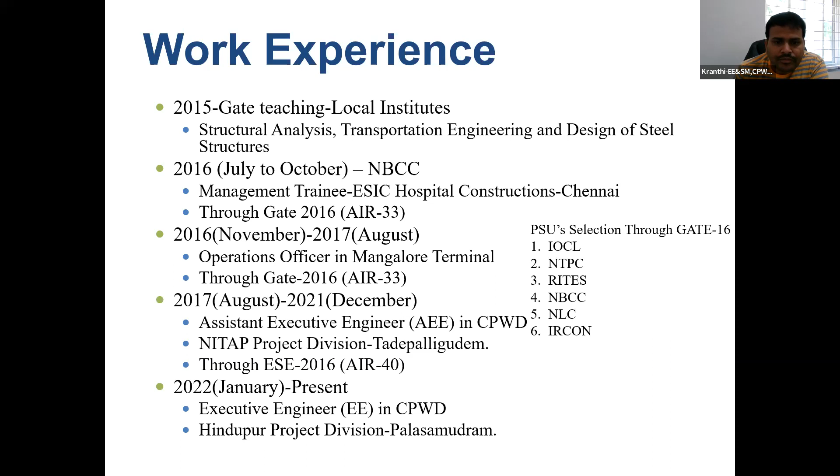So coming to this NIT Andhra Pradesh, when we were given the task to construct it, they said they had to occupy the campus within a 1.5 year span. There was no temporary accommodation for the people, so they asked us to construct very fast and deliver within almost 1.5 years. To deliver this entire campus, we divided the construction of NIT into two phases. The first phase, they said, is sufficient to occupy and conduct the classes.

It is very difficult if you go with normal cast in situ construction. So what we opted for is the precast or prefab building system. On this screen you can see these different elements. Can you see my arrow?

Yes, sir. It's visible, sir.

Yes. If you see in this system, this is the framing system, where we will be having columns, beams, and these are the walls, this is the staircase, and this is the foundation. This is the footing part. This is the stem column, and this is the footing.

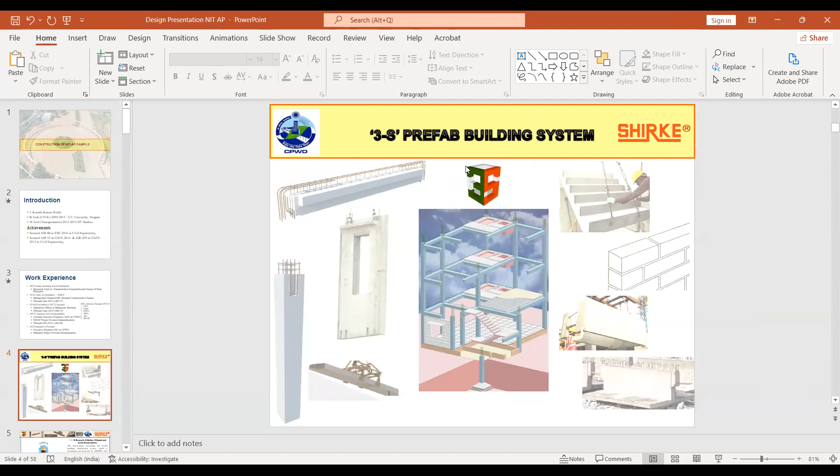We can't see the video, sir. You can't see the video? Yes, sir. The video is not visible. It's not visible. Okay. So I have shared it, but... Now can you see? Now it is visible? It's visible, sir. Okay, chalo.

Yeah, see, these are the columns, these are the hollow columns, and these are the beams I am talking about. These beams are not casted 100%. These beams are casted 75% at the precast factory, and the hollow columns are casted at precast, and they will be taken to the site, and there they will assemble them using tower cranes.

And if you see, this is the beam that is casted. Whatever development length is there, LD, they will be casting at site only, and there will be sleeves in the column, and they will assemble at site. And at site, to transfer the load from top floor to bottom floor, they will be using these dowels. This is the technical term we use. These dowels transfer the load from the top floor to the floor below.

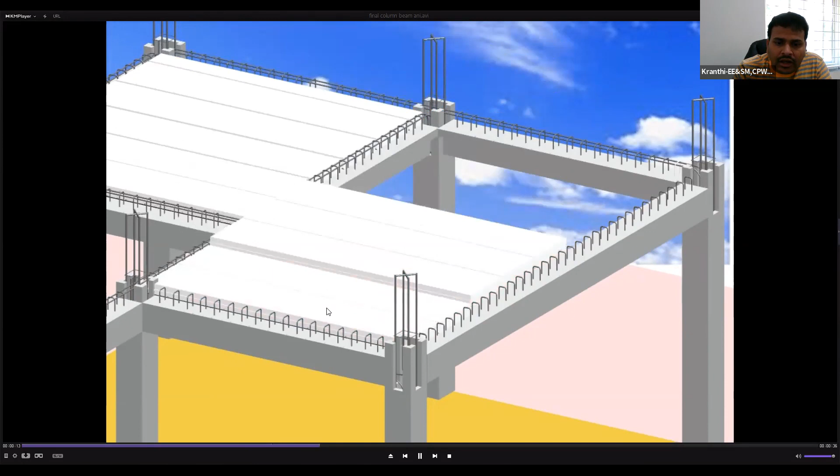And these are the slabs, and I will be showing the site photos to you later. These are also casted 75%, and they will be keeping this steel. And these are the top reinforcement in the beams, and they will be doing the concreting again inside the columns as well as the slab.

So this portion we call a screed. Once this assembly is done, we will be doing the concreting. This we call screeding. So this is the simple way each frame of the building has been constructed.

So now coming to this. What Shirke has opted is a technology developed by Shirke itself. They call it 3S prefab building technology, where 3S stands for strength, safety, and speed. If you follow these three in any construction, strength, safety, and speed, you will definitely...

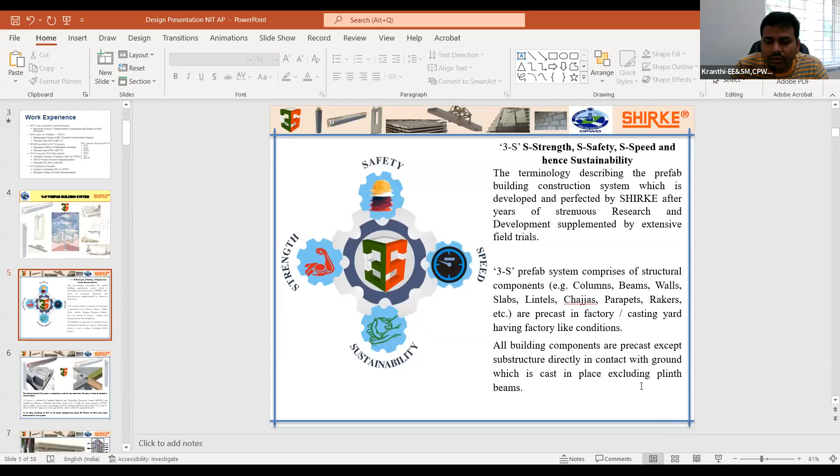So now it is visible. Yes, sir. Yes. Okay. Sorry.

So coming to this, the technology I have shown to you is the technology developed by the Shirke team. They call the system a 3S prefab system, where 3S stands for strength, safety, speed, and sustainability. So if you follow the three at a time, strength, safety, and speed, definitely you will be achieving sustainability.

Usually this 3S prefab system comprises mainly the structural components like column, beam, wall, which are the heart of any frame structure. All these structural members will be cast at a precast or casting yard, transported from the factory to the site, and erected using tower cranes. But when it comes to the foundation, what we call the substructure, they will do cast in situ.

It is a normal thing. So these are the small pictures where you can see this. These are the walls and these are the slabs. On the slab, they will put the screed reinforcement and do the screed. In this 3S prefab system, there are two types of precast technology Shirke has adopted. One is the column-beam junction. It's a frame where the slab rests on the beams, the beams rest on the columns, and the columns transfer the load to the footings. This is called a framed structure, what we normally use.

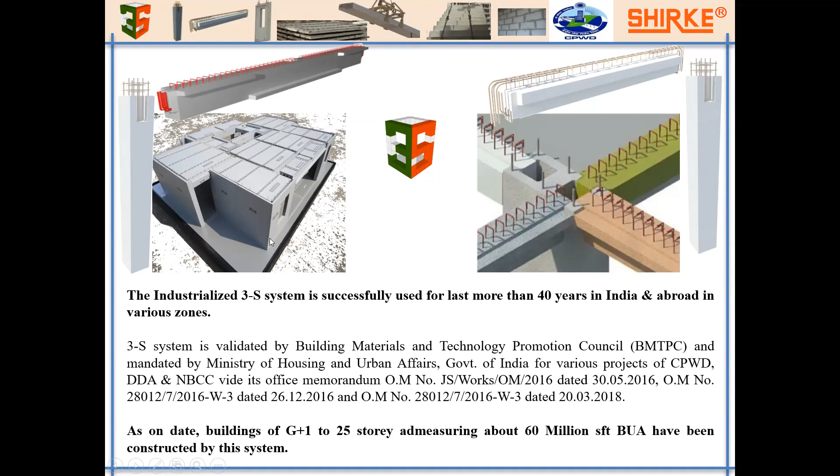Column, beam, framed structure. Whereas in the other technology, they use walls. Here there will be no columns. Only the slab will be directly resting on the walls, and these walls are precast walls. The load from the slab will be transferred directly to the walls, the walls transfer the load to the bottom floor walls, and the ground floor walls transfer the load directly to the plinth beams.

This is the technical term. It's nothing but a beam. The beams placed at ground level are called plinth beams. So these walls transfer load to the plinth beams, from plinth beams to the stem columns, from there to the footings, and from footing to the ground. So there are two ways you can precast: one is by adopting the walls, and the other is adopting the framed structure.

Usually we use walls in, for example, a hostel building where we have a repetitive nature, like all similar rooms, spans are very small, and the height of the building is also low. There we can use precast walls. Otherwise, if we have very large spans and the floor-to-floor height is very high, we can use the framed structure.

This 3S system they adopted is already validated by the Building Materials and Technology Promotion Council, which is mandated by MoHUA, the Ministry of Housing and Urban Affairs. Using this technology, they can build from ground floor up to G+25 stories. I think they have constructed more than 60 million square feet of built-up area. These I already explained to you.

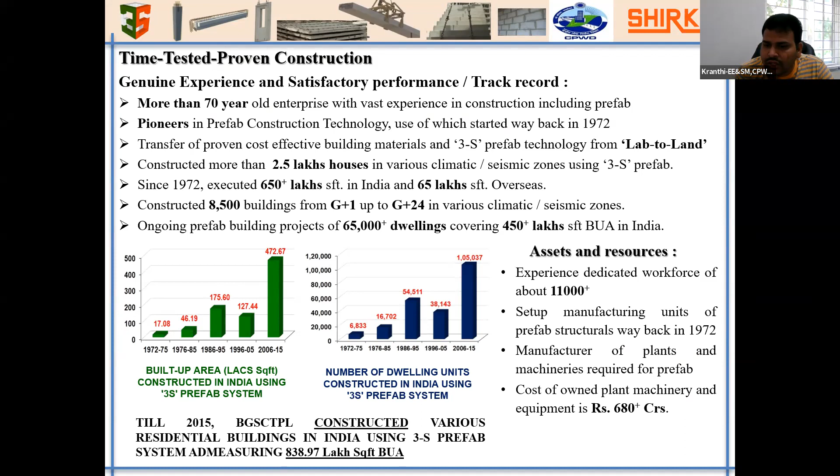This technology is a time-tested, proven technology in construction. I think they have been adopting it for more than the last 70 years. This slide shows how the built-up area has increased over the years using prefab, because nowadays everyone wants their buildings in a very short span of time with very good quality, and because of this everyone is adopting precast technology.

So coming to this, before going to the construction part, I have to say what some of the design assumptions are that we considered while designing NIT Andhra Pradesh.

So these are a few conditions which we already kept in my tender. Based on this, the contractor has to follow this construction. Whatever foundation we specified should be a minimum M25 grade. Up to foundation level, they should be doing cast in situ construction. Above that, they can adopt precast, and we plan to design this entire campus for a 3-star Griha rating.

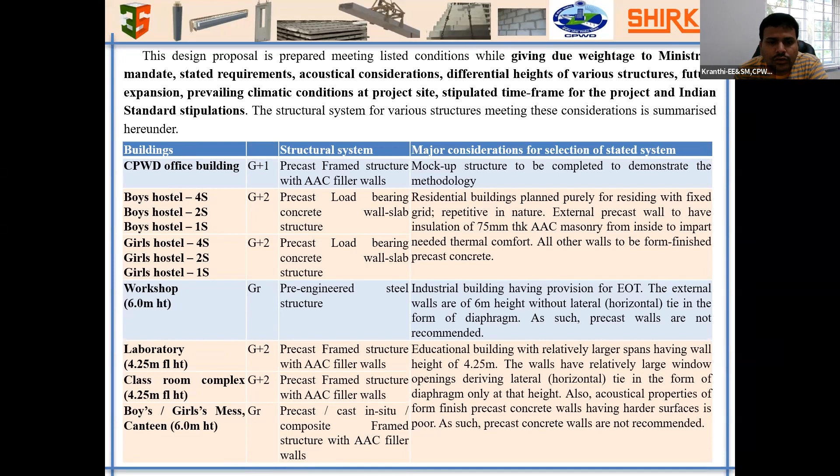These are a few buildings, mainly the phase 1 buildings, where they adopted certain types of structural systems. If you see my CPWD office, laboratory, classroom complex, boys mess - all those adopted precast framed structure with AAC filler walls. The remaining hostels adopted precast load bearing concrete wall slab structure, which I explained previously - these two systems. Some of the quarters mostly adopted precast framed structure with AAC filler walls.

These are some minimum criteria. For all substructure RCC, we used minimum M30 grade, and foundation we went up to 2.5 meters depth, where we have a safe bearing capacity of 25 tons per square meter. All these things were arrived at from detailed geotechnical surveys, and we have designed for wind and earthquake as per IS codes, and even fire rated all the structural members for a minimum 2 hours fire rating.

This project is at Tadepalligudem, which is near the coast of Andhra. So we have taken a moderate exposure condition, and for the precast composite structural elements, we have followed hollow core columns, precast walls, solid beams, and solid slabs, including staircases also.

These are the normal things which you will be studying in your theoretical studies, and the same will be applied while designing any buildings. One is dead load - these are the few dead loads we apply as per IS 875 part 1, and live loads as per part 2. These are some materials we have used, the unit weights, and all the occupancy classification has been done as per the standards.

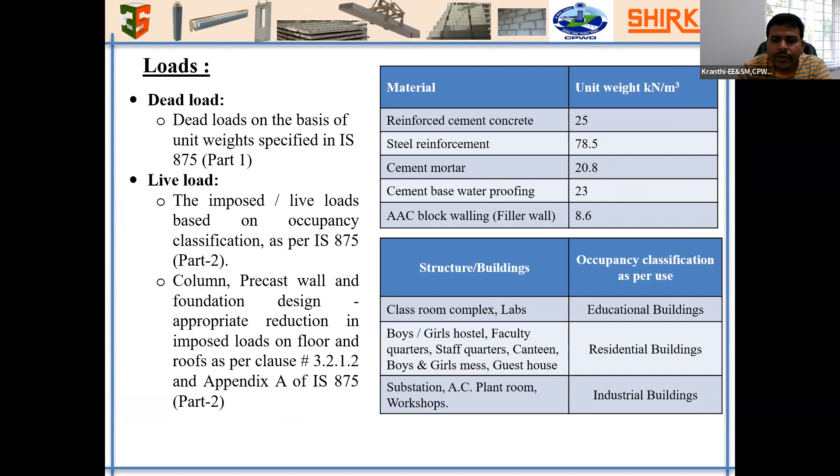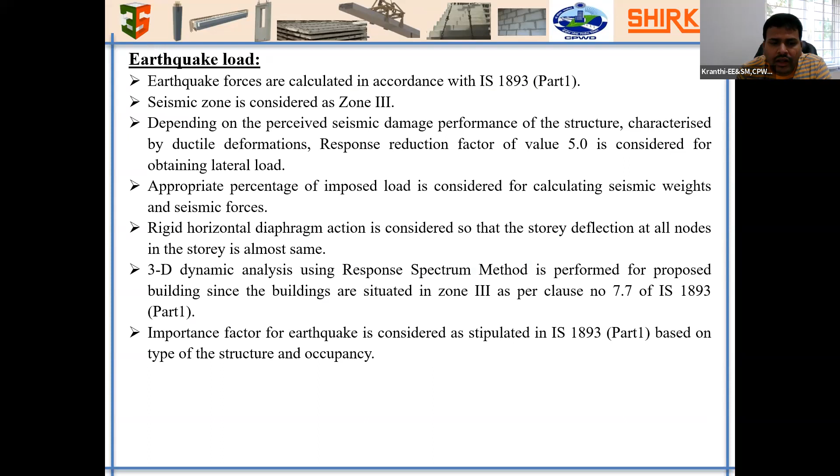Similarly, coming to the earthquake load, Tadepalligudem falls under zone 3. Based on zone 3, as per IS 1893, all this detailing has been taken - what is the occupancy capacity, what structure type it comes under, what is the importance factor, and how many residential rooms there were. All those things were taken from IS 1893.

The other thing is wet joint construction. If you opt for dry joint precast technology, you can do it very fast. But the main disadvantage is these are all non-ductile connections, where you cannot provide ductile reinforcement. Whatever reinforcement you provide as per earthquake development length, that should go from beam to column, will not be there in dry joint connections.

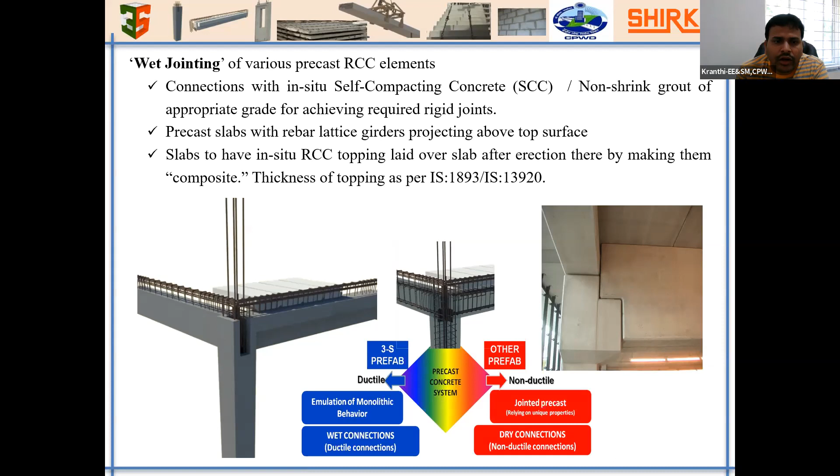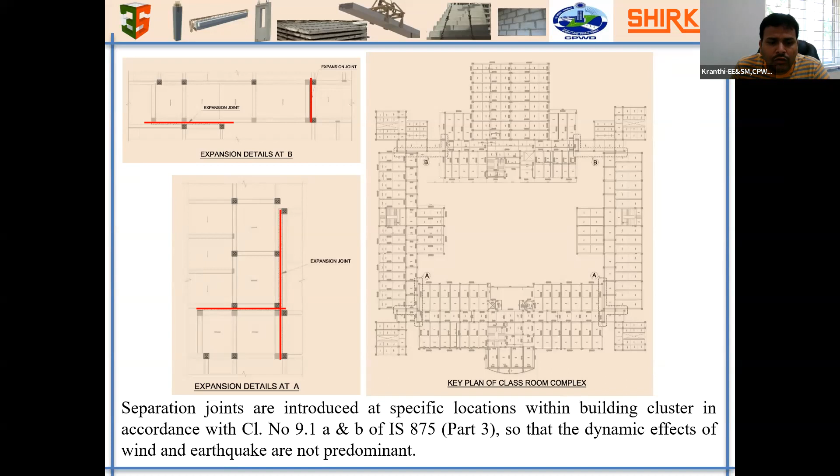Coming to this is the master layout of Tadepalli Gudem, and this is the first phase. I have not updated this drawing - we have constructed phase 2 also. While designing based on the length of the building, this is a typical classroom building. As in any construction, whether cast-in-situ or precast technology, if the length of the building comes to more than 45 meters, we go for an expansion joint. So similarly here also we will be going with expansion joints, and that provision we can take here.

For any building, when doing structural design, first they have to do these framing plans. There is a software called FrameWin - I think Shirke has adopted FrameWin to get the column sizes and all those things, and they will export this model to ETABS for further analysis. These are the ETABS models.

When coming to the design part, there is no difference between cast-in-situ design and precast design - design always remains the same. The way they execute things is different. So how a normal building is designed, the same way the precast building also will be designed - just like in ETABS, they will have a column frame and apply dead loads, live loads, wind loads, earthquake loads, and do analysis.

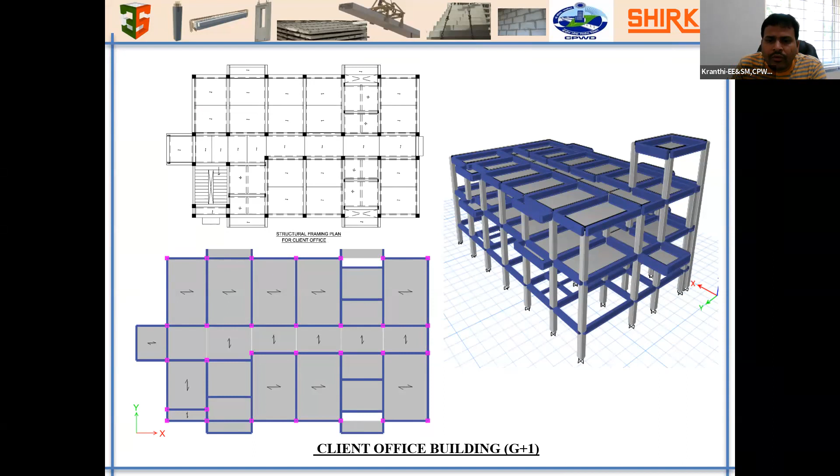So accordingly, the way how you are executing, whether with the precast wall or column beam, your design should be there in the ETABS.

And this is the workshop building where we went with a pre-engineered building. We have not adopted the precast here. Why? Because the column height is almost 6 meters. It is very difficult to have a precast column of 6 meters, and casting at site is very difficult. So what we did is we went for a pre-engineered building.

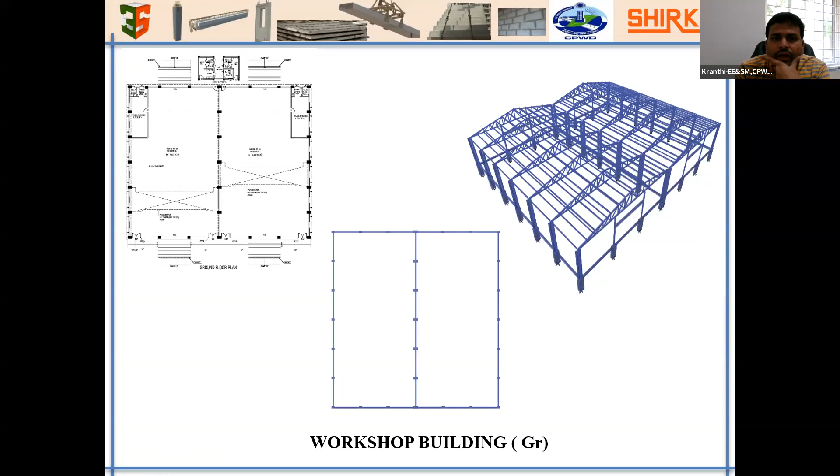Okay, so finally we don't want this look. So what we did is these columns, the entire columns, we used concrete to encase them and finished. These are the pre-engineered ones. I will show the final photos of this, and this is a typical classroom building.

And this method of design, as I already said, there is no difference between the cast-in-situ and precast. Same IS 456 will govern the design, and ductile designing will be as per IS 13920.

Okay, and these are the column reinforcements. They will be arrived at after analysis, whatever load is coming through the ETABS, they will consider this load and design accordingly. And if you see the beams, the column ETABS will give the reinforcement required along the ends and middle. According to this, they will be designing the beams, and similarly the columns.

And if you see now, in normal construction, normal cast-in-situ, whatever reinforcement is coming here, we simply adopt it here. But in precast, unlike normal cast-in-situ where we extend the column reinforcement to the upper floor and cast the column at the same time,

in precast, this column will be cast separately, and another column will be cast separately, and they will bring this column and keep it here. So first, as I already explained, at site they will be casting these hollow columns. Inside, they will not be there - these hollow square columns will be there. In these hollow square columns, they will design for whatever force is coming at this section. For this entire force, they will design the reinforcement in this hollow column. All the reinforcement will be there at all the ends, it will be taken care of.

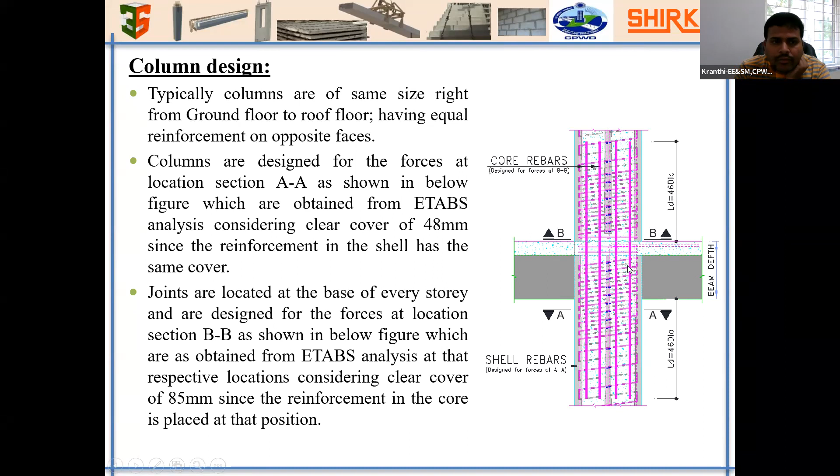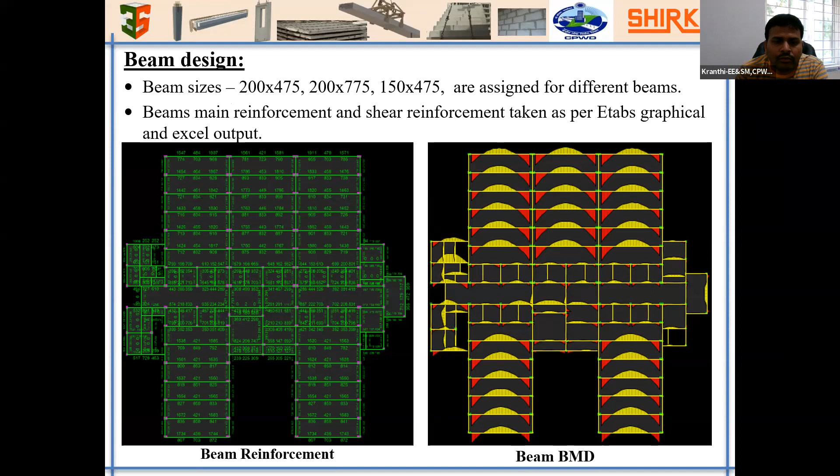This is where they do the column design. Similarly, the beam column joint they will be doing on the basis of strong column and weak beam, as you studied. And for these beams, the beam reinforcement and all those things they will be taking from ETABS models only.

And the precast wall slab, if you come to this precast wall, it will be designed as per IS 456 with the minimum horizontal forces applied and 2.5% of the vertical. These are the connections where they are giving, and they will design with the minimum eccentricity, which you have already studied, and the minimum moment of resistance of the wall based on the slender sections, and the minimum reinforcement. I am not going in depth because you already studied these in your RCC design.

And if you come to the beam column junctions, these are some beam column junctions. Maybe you cannot understand these things, so I will show this in the form of pictures. These are the casting parts that they are doing. Let me explain through the images so that you can understand. If you see these beam column connections, these are the columns, these are the hollow portions.

I think everyone can see it. Are you getting my points? If you have any doubts, you can stop me and ask. Actually, I am busy explaining, but I am not asking whether you are understanding or not. No, sir, we are able to understand. Okay, if you have any doubt, please stop me at any point of time and ask.

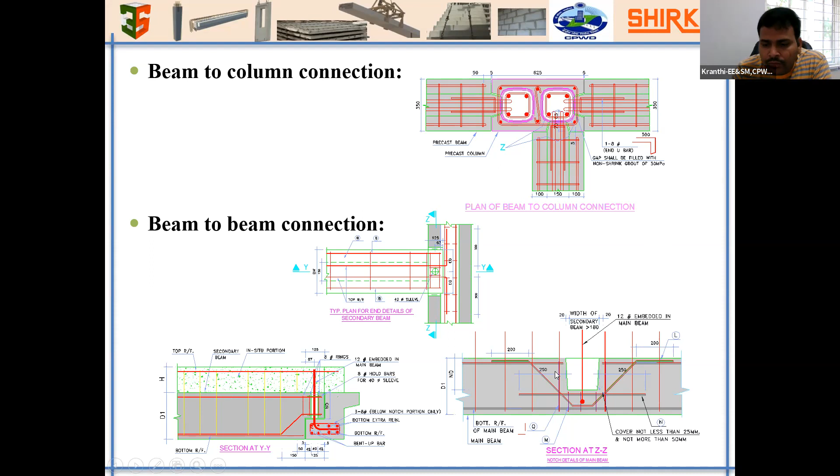And if you come to shear wall construction, the reinforcement from the column will be extended to here. If you see here, there will be a sleeve. These are the sleeves. Whatever reinforcement is coming from the dowel part, they will embed it in this, and they will put these cutouts.

They will be filled with the non-shrink micro concrete, which does not require any curing, and it will not shrink either. Okay, so this is the way they will do it, and I will show how the two walls will be connecting. If you see the connection of these walls, here there will be a wire loop. Okay, this is the wire loop.

When two walls are connecting, this side there will be a wire loop, and this side there will be a wire loop. Inside this they will be designing the reinforcement, they will assemble at site, and this white portion they will grout at site with a non-shrink grout, which will not shrink. Okay, so this is the typical two straight walls. If you see, these are the perpendicular walls. Similarly, they will be doing like this.

Okay, and these are three walls coming, and these are all the corner walls. So these are the reinforced, looped wires. Inside these loop wires they will make a design for the reinforcement, and this reinforcement will be through and through from top to bottom. So these will act as one joint. It will bind the integrity between these three walls, and these are the precast slabs.

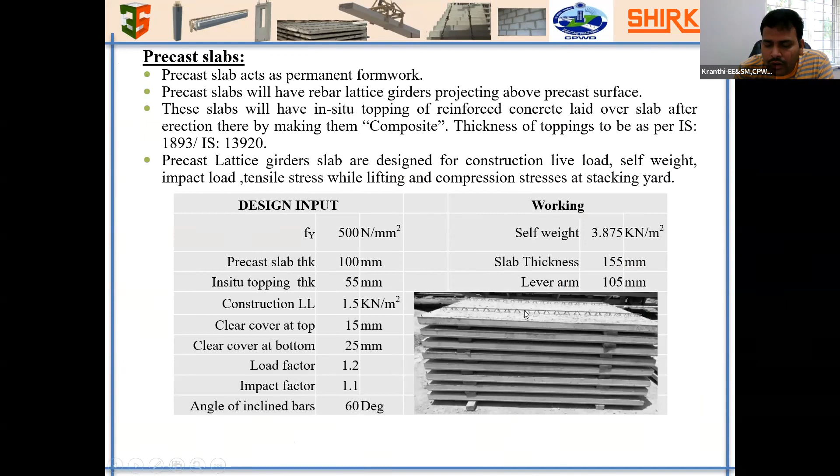So again, if you see, they will be casting 100 mm thick slabs, and they will be shifting them to the site. They will be placing them on top of the beams, and for the remaining they will be doing the screeds. Okay, and this is how they will be resting the slabs on the beams. If you see, this is the precast slab. This slab will be rested on the beam portion. This is the last beam. That's why you have an L kind of thing.

So from here the top reinforcement will be going to the beam, and this is the beam main reinforcement, top reinforcement, and they will do the screeding. Okay, if you see, from one line you can see how it is going from top to bottom. From here the dowels will be bent. If you go from bottom to top, this is the column, from footing column, stem column, it is coming.

They will place the dowels, these hollow columns will be placed, and they will do the screed up to half first. Again they will assemble these beams and all those things, put the dowels again, and do the screed. Similarly, it will go on up to n number of floors. At the top floor, whatever dowels are coming will be bent into the roof slab, and they will do the screeding.

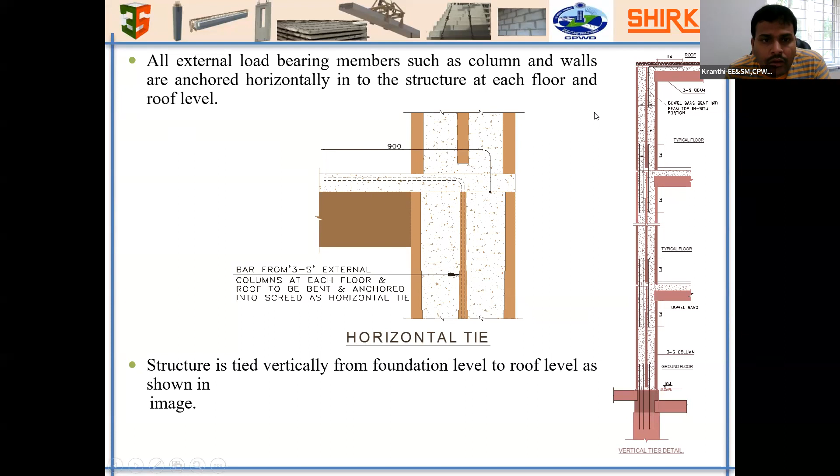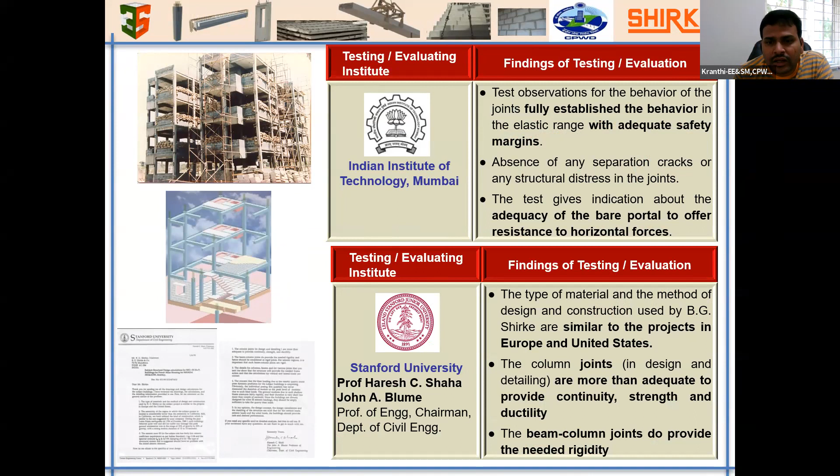They did some load tests and all those things, and these are some observations and findings given by IIT Bombay. They have some research papers on this, and this technology's patents belong to Shirke only. These are the typical field tests conducted at different places, and at IIT Roorkee they have tested this prefab system for zone 4.

If you see here, they have a framed structure for G+1 or G+3, I think, and they have simulated earthquake loads. They have seen the behavior of this building in case of earthquake, and they have a report saying that this prefab structure is well suitable for up to zone 4. They have been given a certification from IIT Roorkee. Okay, so these are some things from IIT Roorkee.

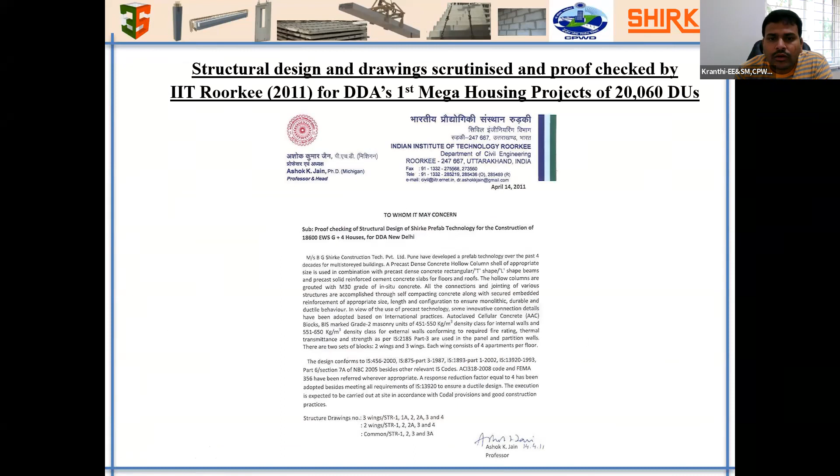So these are the few theoretical things that I have explained. So now let me explain through the site photographs, so that you will understand clearly from a site point of view. So are you able to see my screen?

Yes, sir. Yes, right? Yes. So if you come to the side, this is the... Yes. Okay, are you able to hear me? There is no problem in my voice, right?

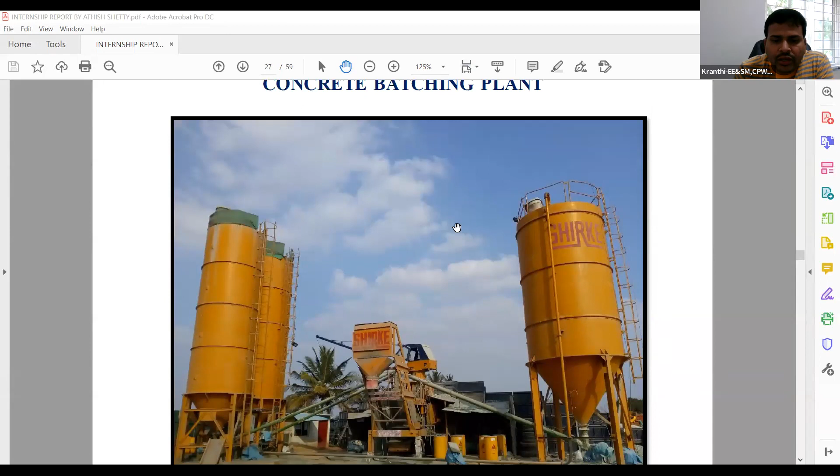Yes, sir. Okay, chalo. So if you come to the site, if you see in any site, this is a must and required: the concrete batching plant. This is where you will be doing the mix design, and these are the silos where you will be having fly ash on one side and cement on another side, and the coarse aggregate, fine aggregate, all those things will be there. And this entire equipment is called the concrete batching plant. And these are the fine aggregate and M sand or sand, whichever they are using.

Okay. So coming to this precast, first I will show you the yard, how it will be. So these are the molds. The main advantage of precast is the same molds you can use. The repetition value will be very high. If you use normal cast in situ, we will be using plywood shutters. These plywood shutters will be damaged after 25-35 repetitions. But here the main advantage is it will not be damaged and it will be in a proper controlled shape.

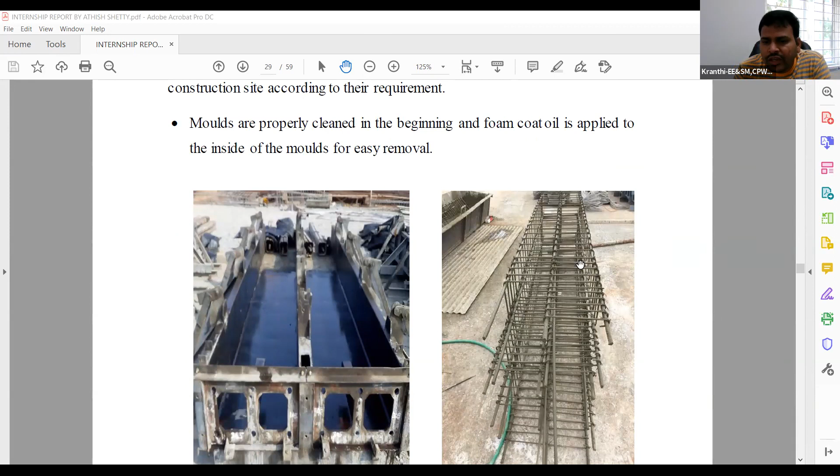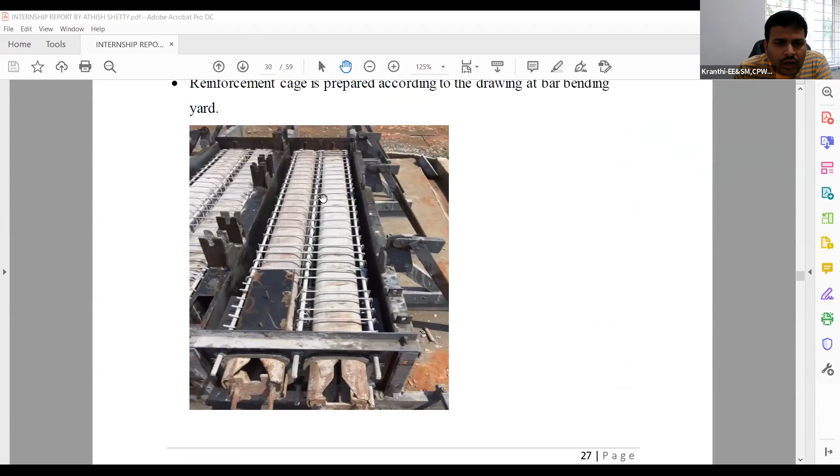So see, this is the beam mold, and this is the beam reinforcement. And if any sleeves are required, they will be providing them here, and they will be doing the concreting here. And the main advantage here is they will be having shutter vibrators. If you see here, this portion itself acts as a vibrator. On top also, wherever there are no vibrators, they will place this vibrator and do the vibration. So these are the molds.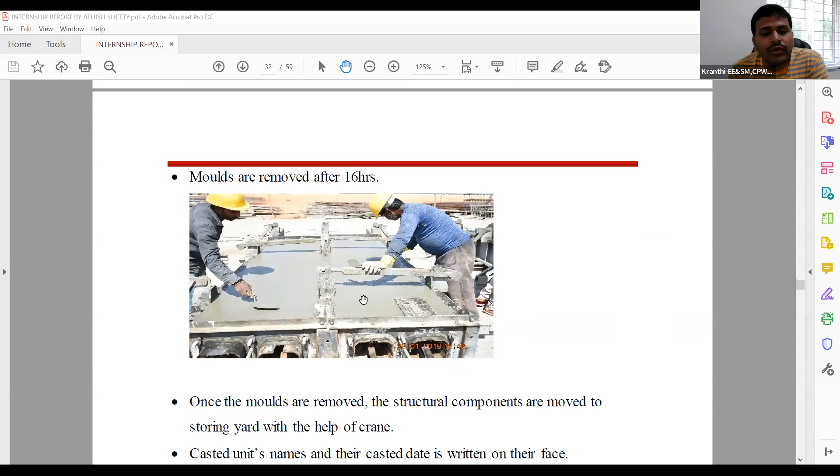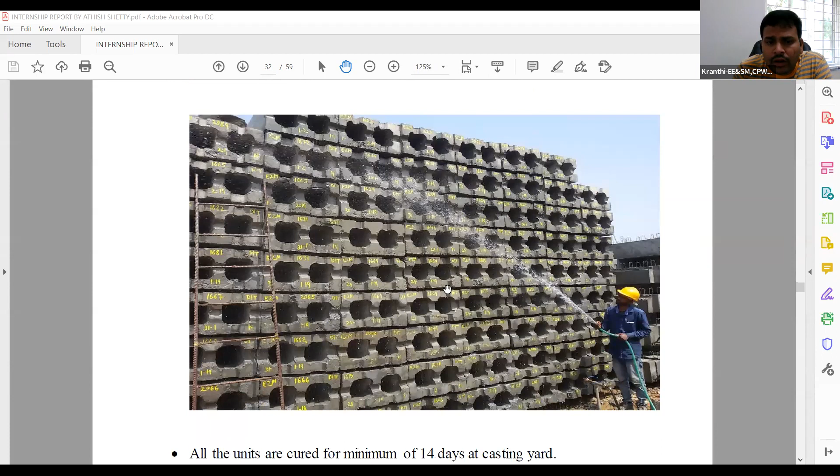After casting in these molds, after 16 hours, they will be removing these columns and placing them at the yard. If you want to remove these columns after 16 hours, it should gain the strength. So they will be using a high grade of concrete. We used minimum M50 for the columns, and for beams and slabs we used M40. These columns will be lifted with the help of cranes and shifted to the yard. These are the hollow columns, and they will be doing the curing at site for minimum 14 days under proper supervision.

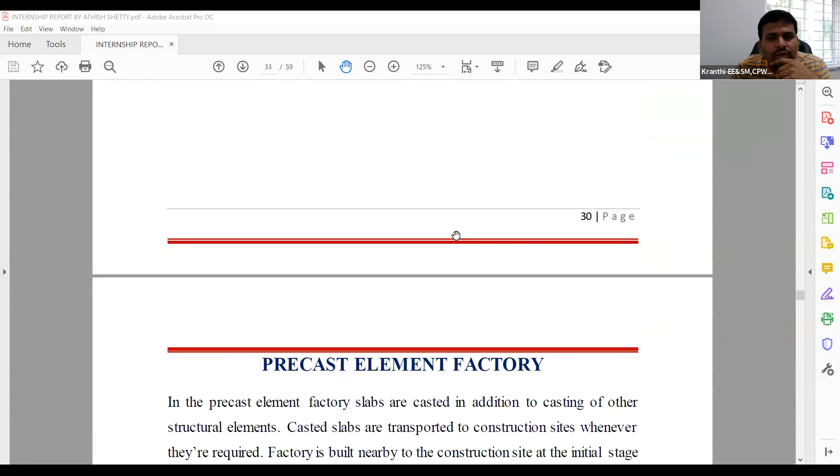And these are the stacking of precast elements. These are the columns, and these are the small slabs, and these are the small lintel beams. On the top of the door, they will be placing a small beam, because we cannot transfer the load from brickwork to the door. To avoid that, we will be placing small beams. Those are called lintel beams. These lintel beams can also be cast precast, kept at site, and cured. Now this is the way they cast columns and beams.

Now coming to the slabs and walls. This will be done in the factory, and this is how a typical factory looks. And if you see, these are the complete shutter molds that are used for slabs and walls. And these are the reinforcement they will be placing on the molds, and these are called lattice girders.

Why they keep these lattice girders is because the main concept here is they want to design everything as a one-way slab. They don't want to design it as a two-way slab. They want the load to be transferred in one direction only, not in another direction. Because of that, they put intermediate elements. This will serve two purposes.

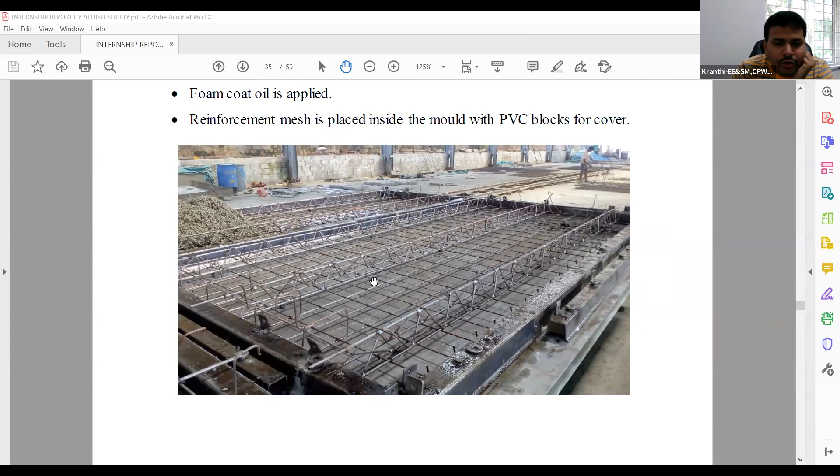This one thing, they can make LX by LY one direction. This LX they can make in one direction. And the other purpose is these lattices will be used to lift these precast slabs. So these are the cranes. Okay, using these cranes they will be doing the concreting.

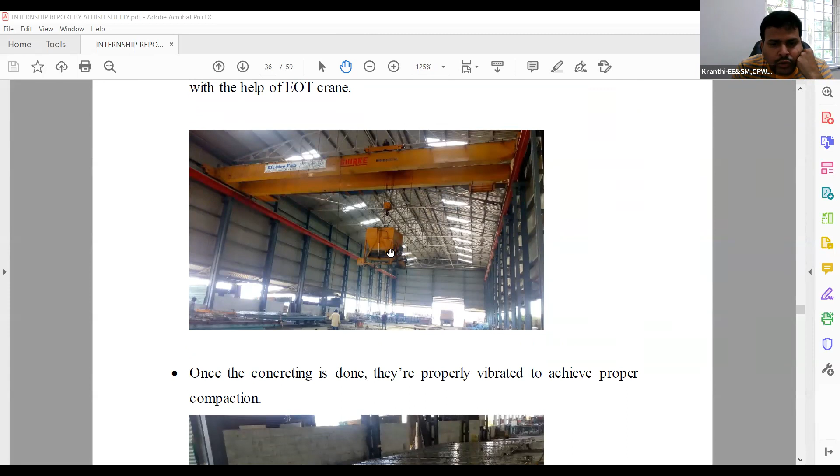So here from this batch mix plant, the concrete transit mixer will bring the concrete, and the concrete will be transferred to these things, and the concreting will be done here. And here there will be proper vibration with this shutter only. So these will be the things. And after 16 hours, they will be shifting it to the site. Okay, and they will be doing the curing.

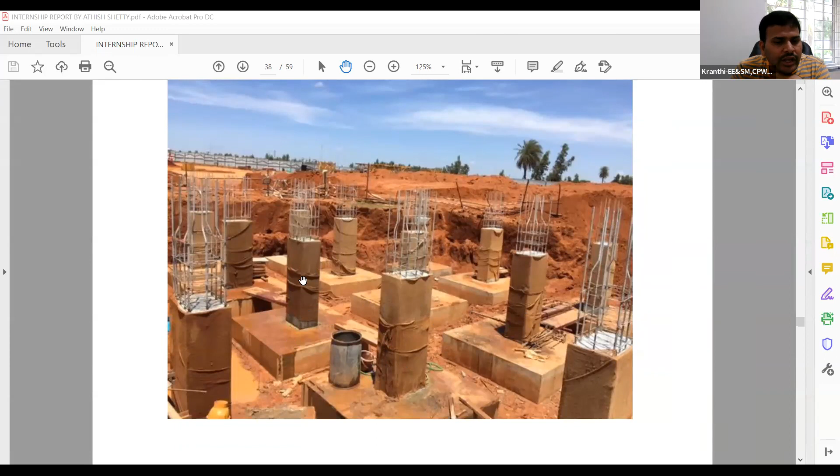Now coming to the foundation part. This foundation will be cast normally. This is a normal cast-in-situ foundation, where you will be seeing the columns. These are the columns, and this is the stem column. The difference between the column and stem column is the stem column is below the ground level. So below the ground level, this is the stem column, and this is the reinforcement. In this they will be leaving the dowels to the top.

I will be showing the practical things. They will be doing the filling, and if any anti-termite is required, they will be doing the anti-termite. These are the footing reinforcement and the stem column reinforcement. Now, if you see, these are the columns, and here they will be leaving the dowels at the side.

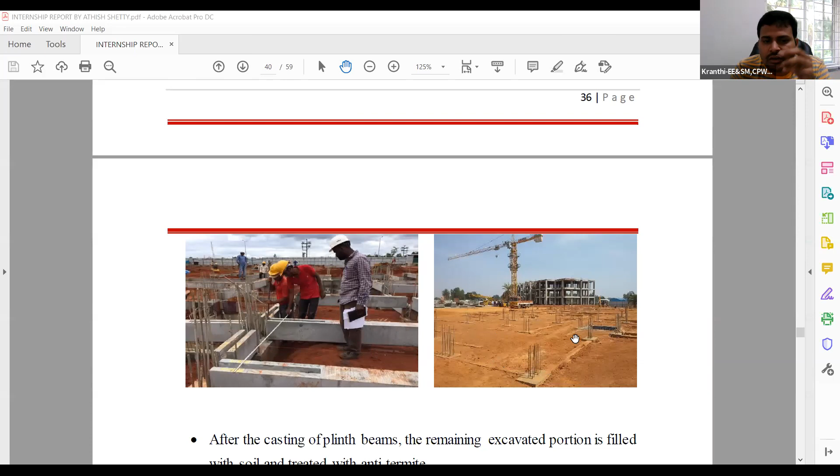If you see here, this is the plinth beam coming in two directions. Whatever negative reinforcement is required, they will be taking from here to this beam. This is the beam, this is the bottom. After this picture, this will come here. On this portion, they will be doing the concreting with self-compacting concrete. After this, the condition will look like this. So these are the dowels I am telling you about.

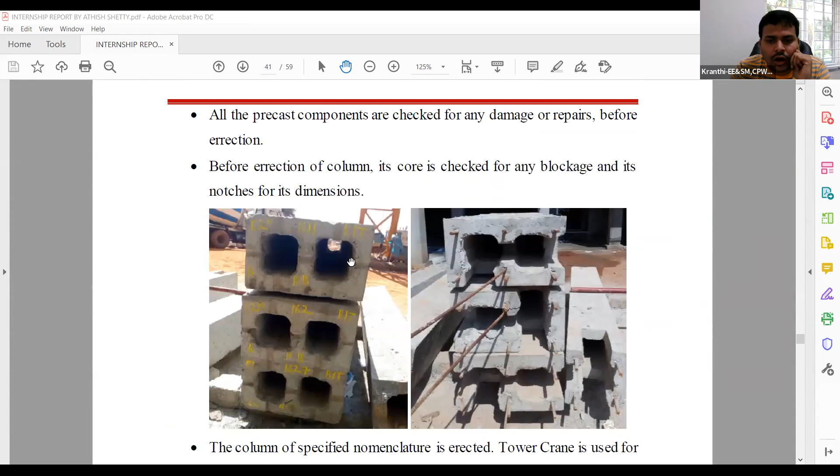Similarly, these are the dowels on the top floor. What they will do is they will bring the columns, place them here, and do the screeding. And this is the typical first floor. I will be showing some other things. So these are the columns. They will bring these columns to the site.

If you see, these are the dowel reinforcement. They will bring this hollow column, place it on these columns, and make it in alignment, proper line and level. If you see this, they will bring these beams using the crane, and while casting itself they will have these sleeves. So the beam will come and rest on these on all the sides, and they will check the plumb, line, and level of the columns and beams.

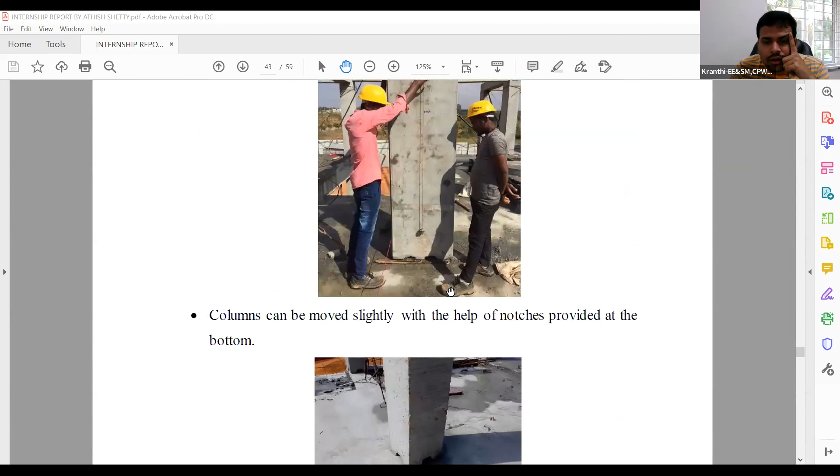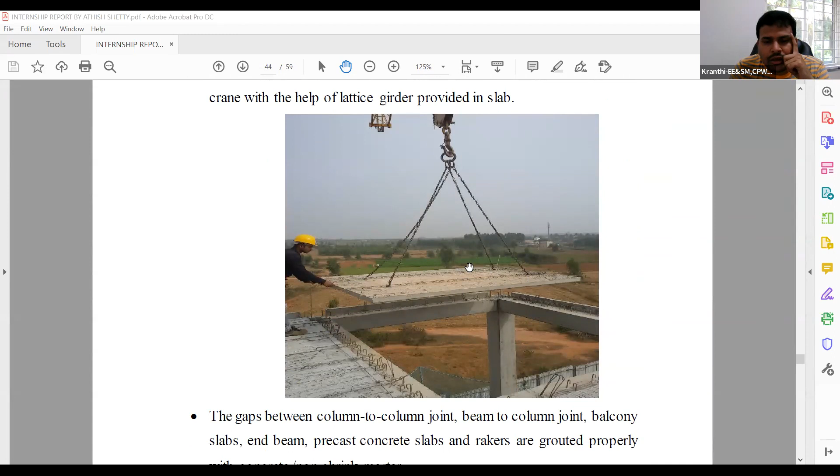From the first floor they will be keeping the dowels portion, and they will be doing the screeding. Once the screeding is done, it will become like this, and again the second floor columns they will bring and erect at the site. If you see, this is the typical precast slab. They will be assembled; this is the lattice girder I was talking about previously. They will be bringing them to site using these lattice girders only.

They will be placing them on the beams like this, and these are the negative reinforcement, the top reinforcement here, and this is the development length as per the ductile detailing that will be going inside these hollow columns. First they will do the column screed, and then they will do the remaining concreting.

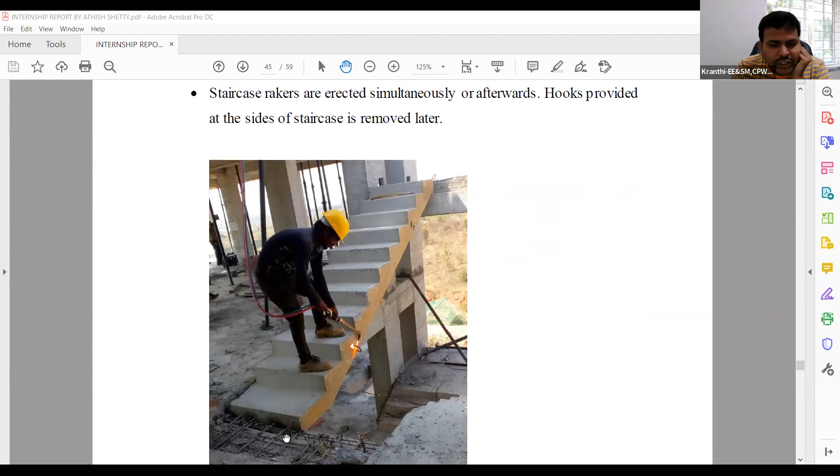Similarly the staircase portion also. If you see here, the staircase will be there. There is a beam, and it will be resting on the beam here and here. If you see here, in this column there are sleeves. So whatever reinforcement is there will be going inside, and they will be doing the screeding.

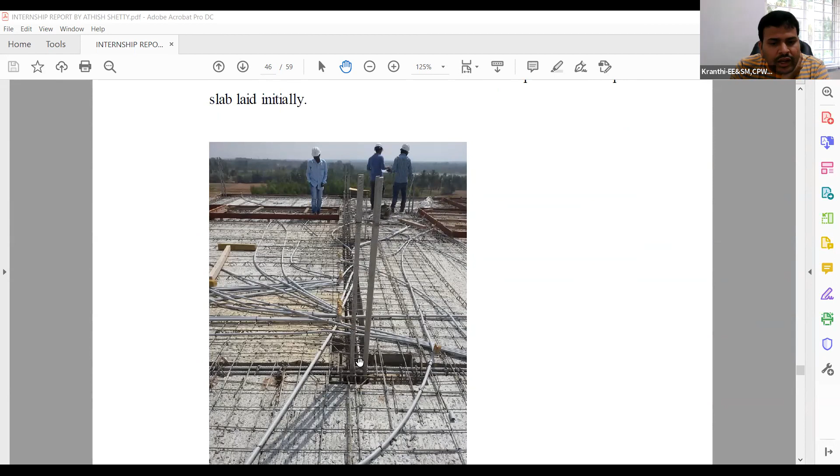Okay, see, this is the typical thing for the first floor. Whatever I said, the reinforcement will be coming, and for the top floor, you need to leave the dowels. The dowels will be placed at the site at this position, and they will do the screeding. And after the electrical conduits, they will do the entire screeding. Okay. So this is what I said to you.

They will be doing the screeding with SCC, and if possible, they will do some vibration. Even if you go with SCC, you will not be getting 100% self compaction. To avoid this, we will be using the vibrators also. Okay. So this will be the finishing. And once this is settled, maybe next day onwards, they can erect the second floor columns, and they can place these beams also.

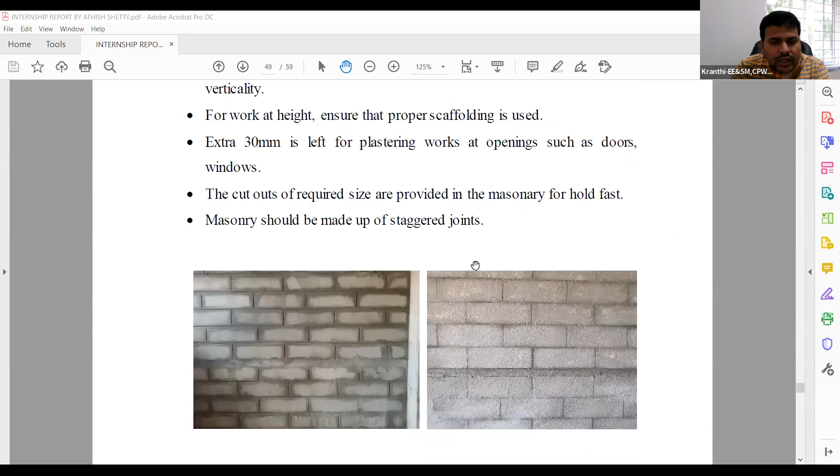Okay, and whatever the frame is there, right? These are the column frame. And inside this, they will be doing this brickwork, AAC blocks we call, and these act as filler walls. Okay, these are the filler walls, and whatever electrical conduits are required, they will be cutting inside the brickwork, and they will be placing these conduits, and they will be doing the plastering. All these junctions, they will be doing the plastering.

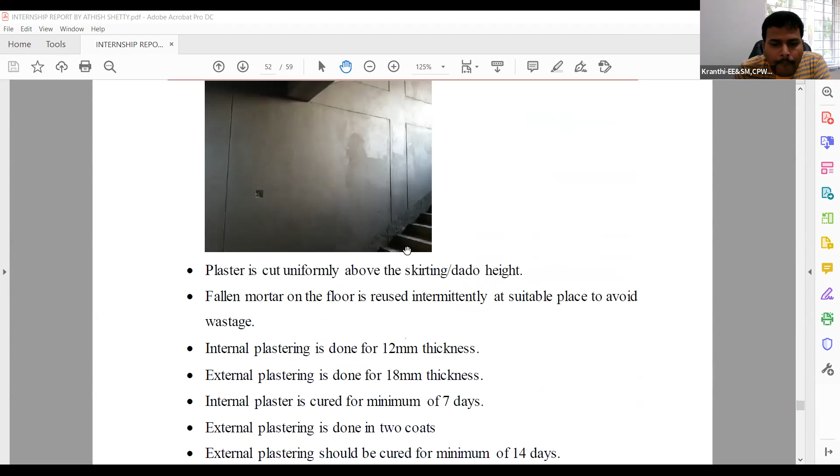And if you see after plastering, it will look like this. Okay, so usually internal plaster will be 12 mm, external will be 18 mm. And we will be doing the flooring. This is called the flooring inside the building, and this is called the skirting. Okay, 150 mm skirting will be done.

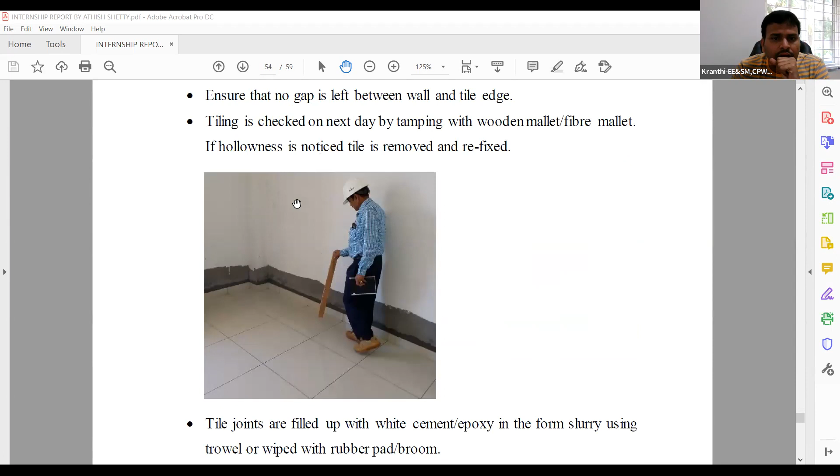This is the laying of tiles, and this is checking the tiles whether any hollow sound is there or not, whether the tiles have been placed properly or not. Similarly, if any retaining walls are required, we will be doing these retaining walls. And these are the few machineries that are required using cast in situ. If you want to use precast, these are the few tower cranes that are required.

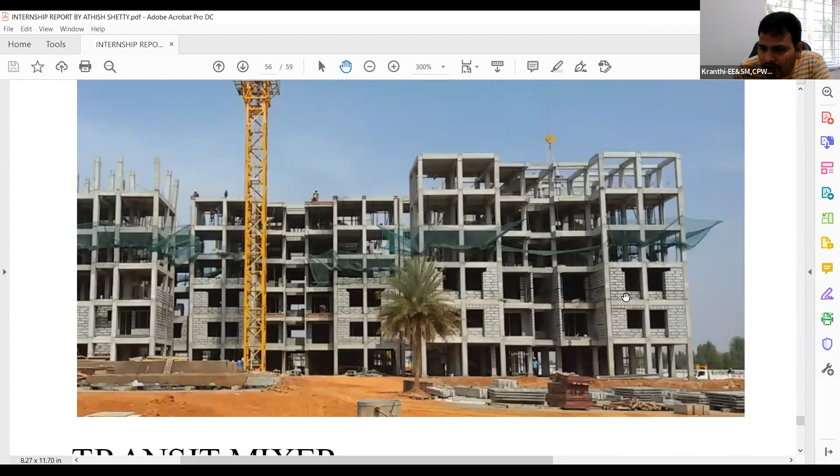So if I zoom in and show you, this is the entire beam column framed structure, and these are the AAC blocks. Okay. See here, on these columns, they will be erecting these things. Again, one more column.

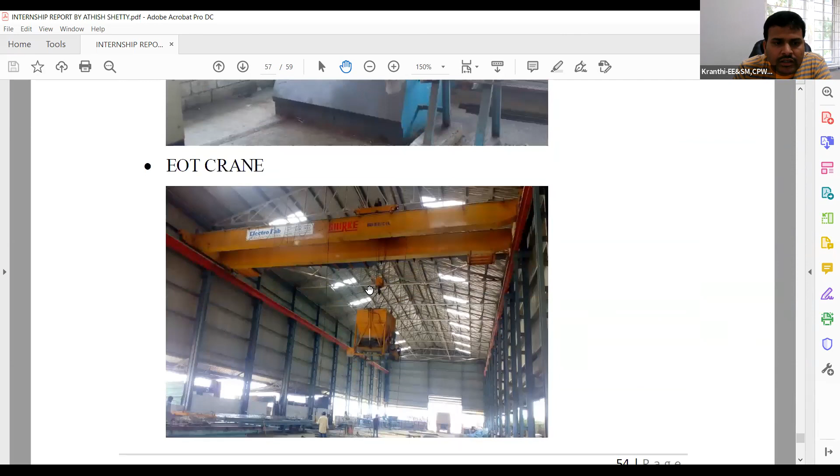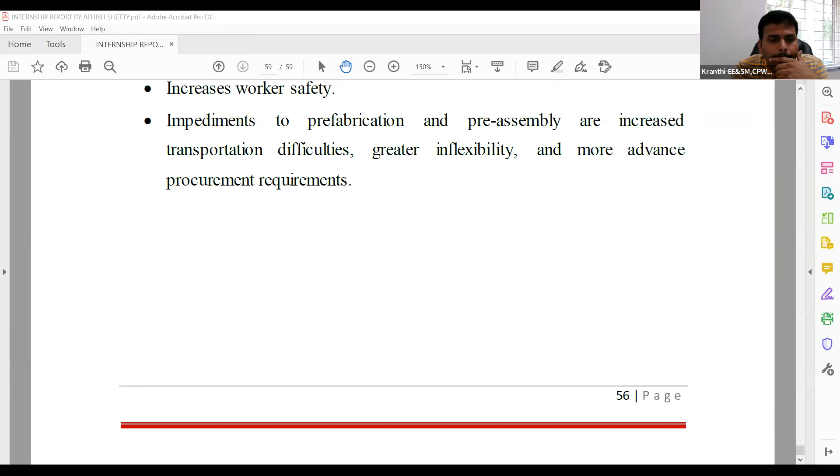Hello? Hello? Yes, sir. Actually, I was not able to hear. Okay, you are not able to hear? No, sir. Actually, my internet connection is a bit wavering. Chalo, okay. I don't know whether I am boring all your students. No, sir. It is quite interesting.

Okay, this is the new technology which we have adopted. So if you have time, I will show some videos. It will be a 5 minute video. If it is okay, then I will show that small video, how the precast slab casting and wall casting will be done. Otherwise, I will just show the photos. Whichever is convenient for you. Video is fine, sir. Okay.

Sir. So 1 minute. So are you able to see my screen? Yes, sir. Okay.

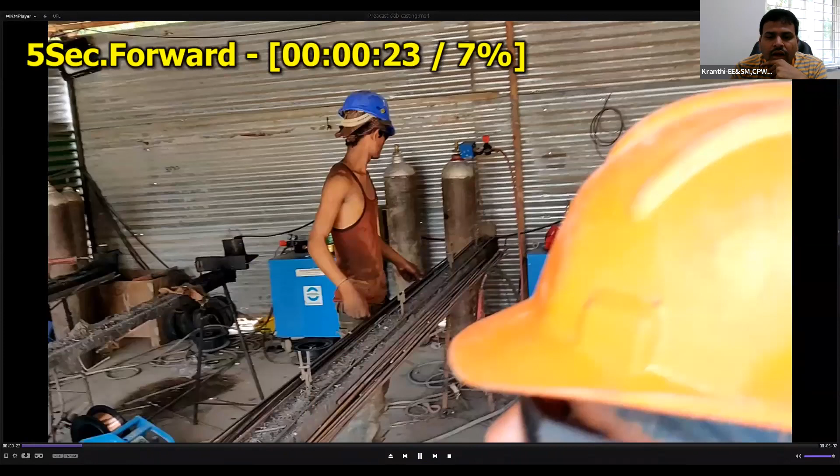This is how the precast slabs are casted. It is a 5 minute video. You can see how they will be doing the bar bending steel at site. So this is what they did at the lattice. As I was saying, in the slab they will be having a lattice. They will be welding this. I am forwarding this. So this is how they do the lattice.

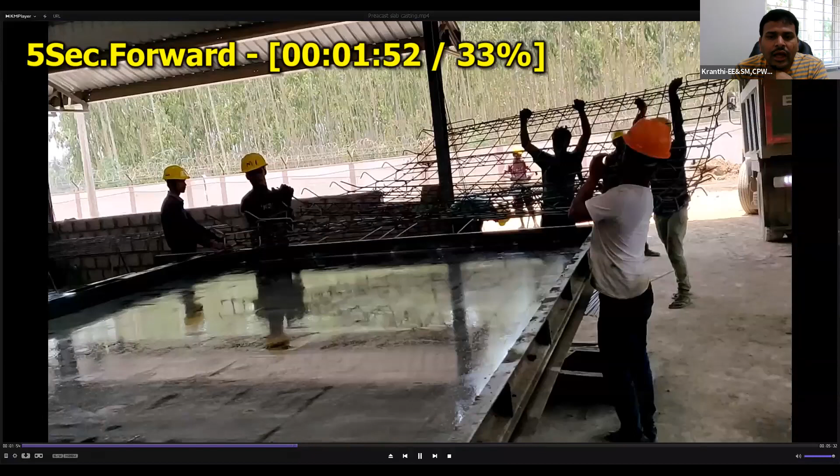So this is how they will tie the slab reinforcement. Okay. So they will do this welding also. And they will place this lattice on the top of the slab reinforcement. And they will bring this slab reinforcement to these shutters. If you see this. Okay. Now, if you see, they will be doing concreting.

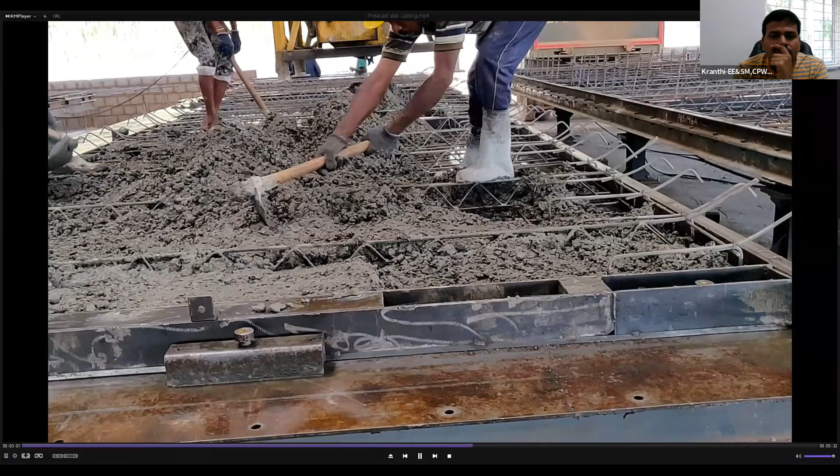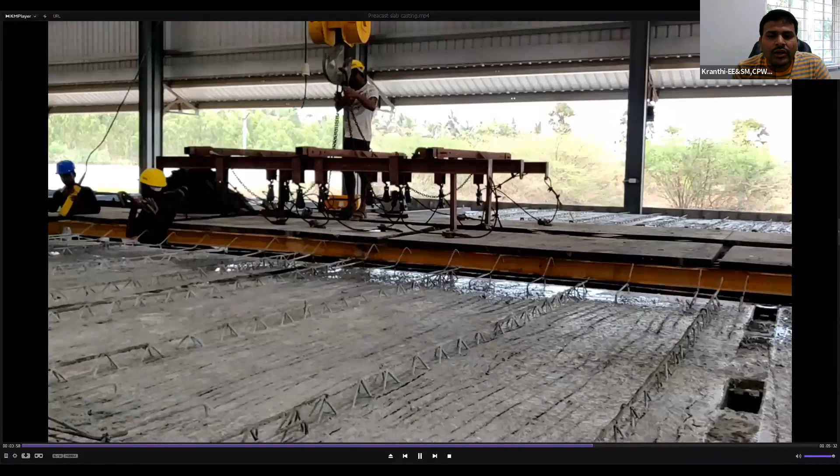So if you see this, automatic vibration will be done. This is the way how it will be looking after 16 hours, and using the lattice, they will be lifting it like this.

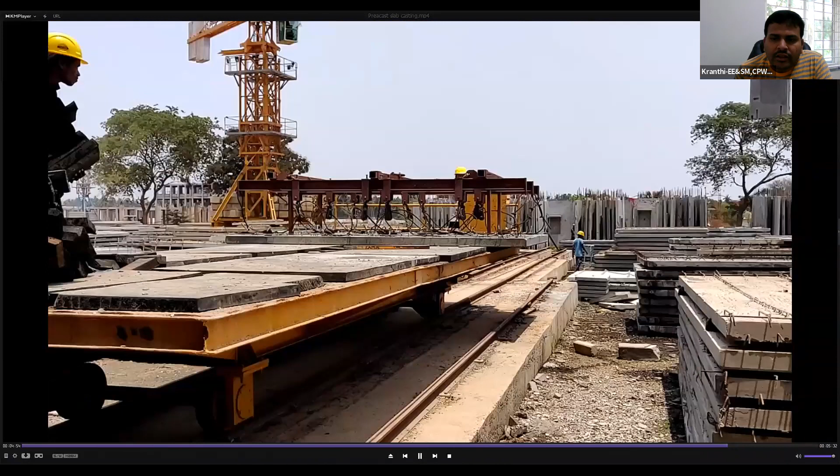This is the casting yard where they will be stacking this. They will be placing rubber mats one above the other, and placing the slab on top of it. They will do the curing for 14 days. This is the way how they cast the precast slab, and I will show you the wall also.

Similarly, this is the wall reinforcement. These are the molds where the wall reinforcement is placed. If you see here, these are the connectors I mentioned, placed during casting itself. These are the loops I am talking about. This will be embedded inside the concrete. And they will be placing the covers on whatever conduits are coming.

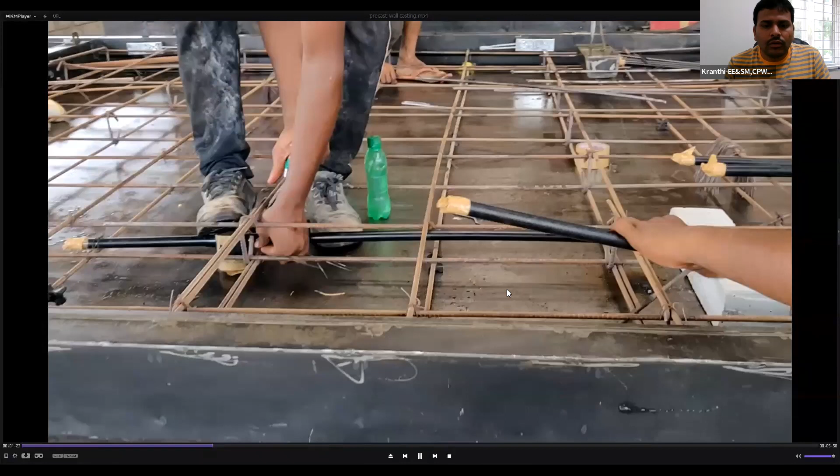Sir, the video is not running, it's not smooth. It's running but with low speed. No, actually it's a time lapse video, and I am forwarding it a little. Now it is visible. Is it visible now? Yes sir, it's visible but not running. Still it's not moving. Now? No sir. Yes sir, now it is running. Okay, so anyway, if you want me to share this also, I will share it.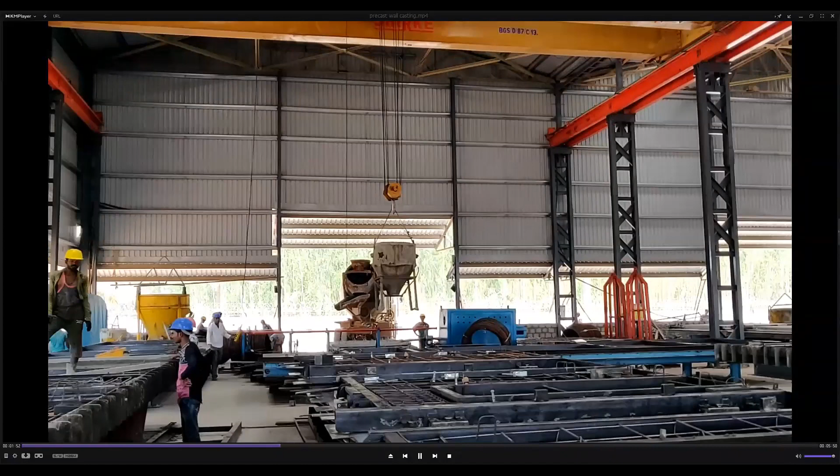Similarly, concreting.

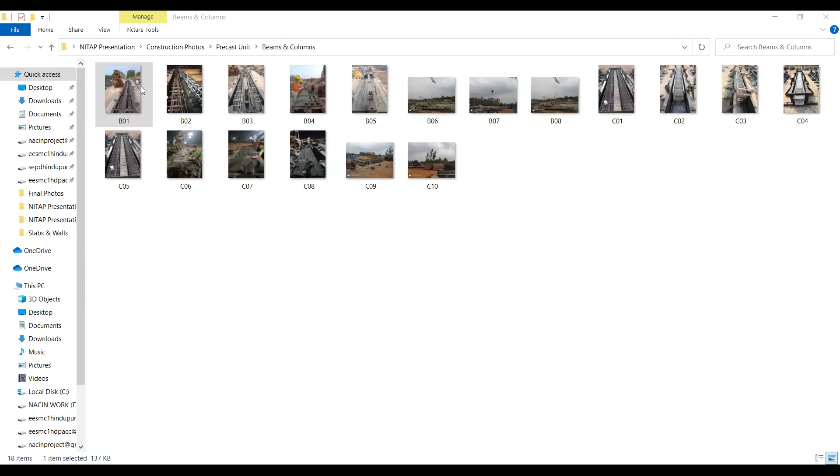Okay, now is it visible, right? Yes sir, yes. So these are the molds I was saying previously. These are the precast, and if you see here, there will be proper cover blocks, and line and plumb of the beam will be exact. If you see at cast-in-situ side, it is very difficult to get this straight kind of beam, but here you will be getting these beams.

And this is the beam reinforcement, this is what I am saying. Roof beams or floor beams, where we will be having the top reinforcement like this, and the top reinforcement will be kept in this direction. These are the sleeves I am showing, and these are the concreting.

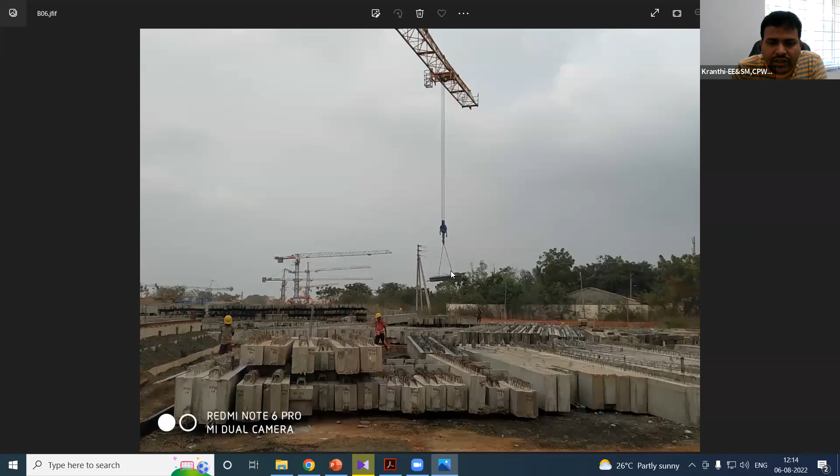This is after finishing, so they will be shifting these things to the yard and placing them at the yard. And these are coming to the columns, these are the hollow columns reinforcement. If you see, this is the mold and this is the column. Here, to make it hollow, they put a mesh like this so that no concrete will go inside.

And these are what I said, right? In this, there should be proper planning, so if any column or beam wants to rest on this column, there should be a sleeve. So this is the sleeve they are providing. And these are the big columns, and this is the concreting. So they will be putting it at the yard. Okay, that's all.

Now let me show a typical building portion.

Yes, now visible, right? Yes, sir, yes sir.

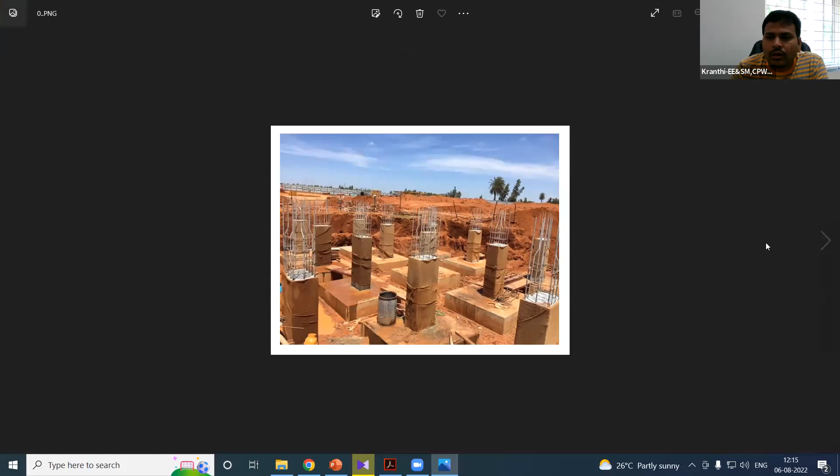This is the normal, I said, foundation, cast-in-situ foundation. These are the cast-in-situ foundation levels. So all the dowels, whatever I said, they are leaving above the ground level. And they kept the plinth beams here. In this negative reinforcement they will be keeping, and they will do this junction concrete. Here beam junction, this is the plinth beams. Here there is no top reinforcement coming, if you see here.

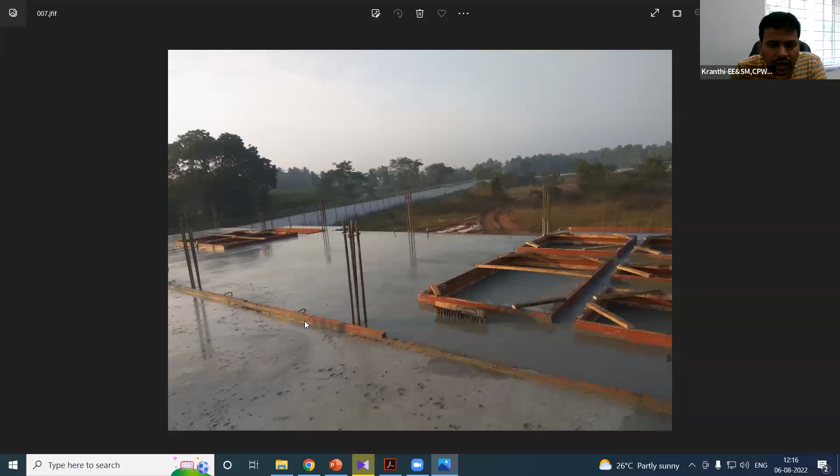So these are the dowel reinforcement for first floor to second floor load transfer. And these are the screed reinforcement, what I said to you. These are the negative reinforcement, and these are the top reinforcement of the beam. They will put the screed, and they will start the second floor.

On top of these dowels, they will be placing these columns again, and this process will continue. So by the time, usually if you take any normal cast-in-situ, once you cast the first floor slab, if you can clearly see here the difference between the first, this is the precast one, this is the cast-in-situ one.

So usually in cast-in-situ, if you cast any slab, it will take minimum 14 days to de-shutter and to do the brickwork. But here the main advantage, where we are saving the time, is when the foundation is going on, we can cast these elements simultaneously without waiting.

Once the foundation is completed, we can erect this very fast. So this entire column, screed, first floor, I can do it in 7 to 10 days. Usually it will take minimum 20-30 days for anyone to cast the slab. But here, within 10 days of finishing the foundation, I can cast this slab.

That is the main advantage, that's why we are saving a lot of time. And after this, within few days, we can bring these blocks, AAC filler walls, and use this here. Once this slab is going on, we are almost completing these walls, inner walls.

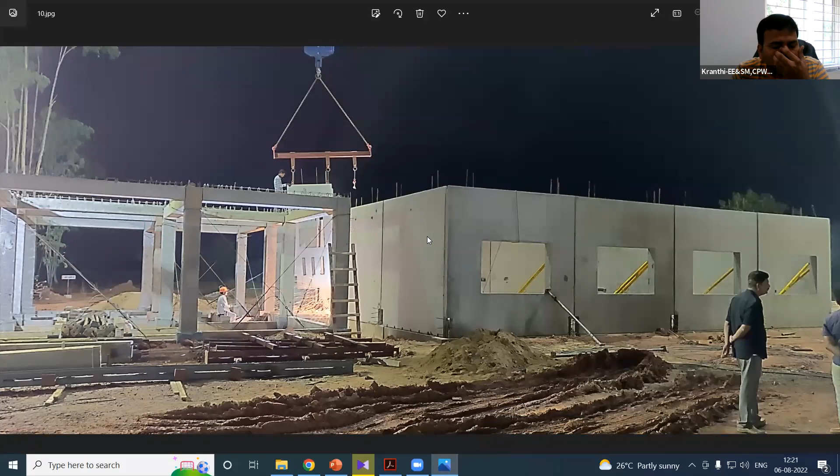Okay, so these are the grade slabs I am talking about, which are casted. If you see here, we are in hostels. These are the toilet portion, and these are the accommodation portion. In the toilet portion, it is usually very difficult for us because we need to run so many plumbing lines.

That's why we opted again for a beam column frame structure, so that we can have walls where we can do the chipping and put the plumbing lines. So these are the walls I am talking to you about. Previously in my slide I showed how these two walls are connected.

Okay, these are the three walls. One wall is coming from this side, and these are two walls, and these will be joined. They will be doing the grouting with non-shrink grout, just like a pack of cards they are placing, but with a proper wire loop. Inside the wire loop, the reinforcement is going on, and they are doing the proper grouting.

If you see my previous slide, here there is a gap, but if you see here, these are properly grouted. Okay, and above this, the slab will be rested here.

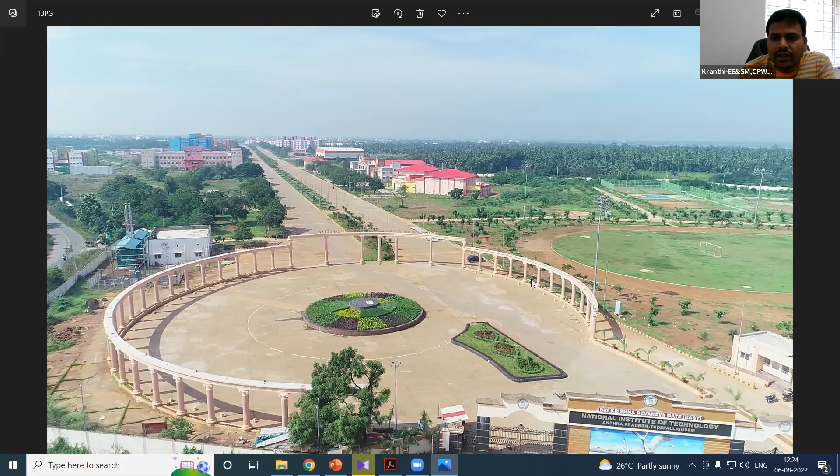Again these slabs, if you see, all those slabs are done with precast only. So this is the typical library block which we constructed using precast only. It is very difficult for any new person to say whether this is done cast in situ or precast. This is a typical library block.

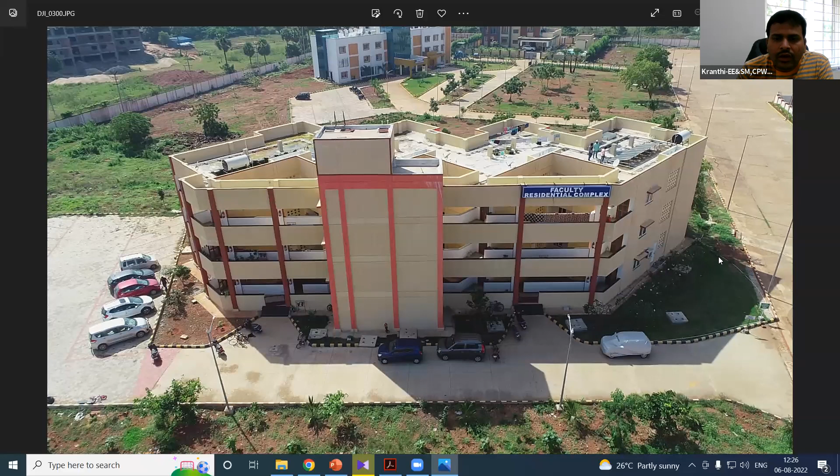Okay, and this is what I am saying, this is the final CPWD office, and these are the other buildings - some other laboratory complex, these are other laboratory buildings. This is the main administrative building. These are some residential quarters, and these are the girls' hostels in NIT. These are all the wall construction.

Whatever I previously showed, that is the column beam, and these are the walls. Here you can clearly see these walls. If you zoom in, you can see this is the panel, and this is another panel - all those things.

So this is the guest house, and this is the director bungalow. This is also a precast one. So all the buildings were precast. So this is the hostel, male hostels. These are the 4-seated, 2-seated, 1-seated, and this is the canteen, mess for them.

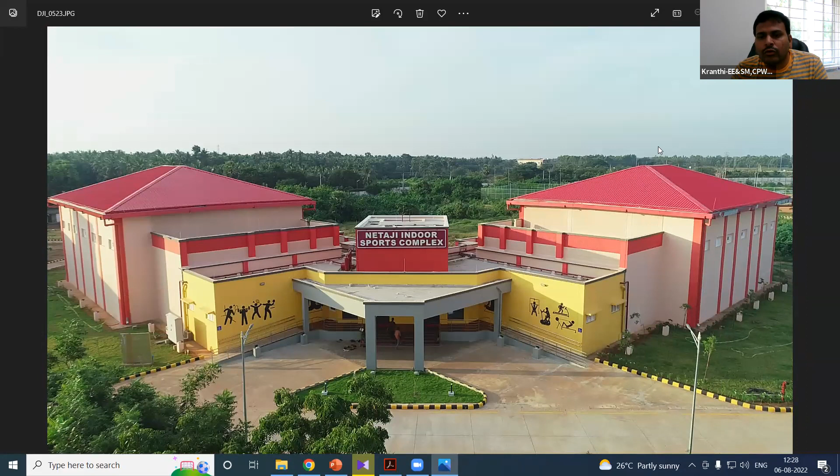And this is the second boys hostel, and this is the mess for this. Okay, and this is the auditorium, healthcare center, and SAC building, and these are the sports complex. Okay, so these are the few photographs of the final.

And I think if you type NIT Andhra Pradesh, there you can see the entire video of this campus also. So I have done this video, and you can see that complete walkthrough video in YouTube also.

So I can conclude that this is how we did NIT Andhra Pradesh construction, both 2 phases. We finished in the span of 3 years. It should have been finished in almost 26 months or 28 months. We should have completed the entire campus, but because of COVID, it was a little bit extended. All those things we finished.

We started this construction in 2018 September or November, and we finished in 2021 August, and we handed over these buildings to the client, and now they are properly using these buildings. Okay, thank you. So this is what we did in NIT Andhra from my end.

So now if you have any questions, you can ask me. Hello? Hello, sir. Sir, it seems... No, it is. Hello. So from my end, it is completed. If you have any doubts regarding the precast, all those things, you can ask me. Okay.

One small disadvantage with this, which I have not said, is mainly with the precast walls. When you are placing one wall above the slab like this, there will be minute small gaps which we cannot avoid. During multiple rainy seasons, dampness will occur. So whenever we see dampness, we have to do grouting at these junctions over a period of time. If you do proper grouting over a period of time, it will be stopped.

That is the only disadvantage with the shear wall construction. But if you go with the beam column joint, there is no problem. There is no dampness problem, because everywhere we are having the framed structure, and we are having AAC block filler walls, and we are doing the plastering. But with the walls, we are not doing any plastering.

If I show the, I will share this to you. Wait 1 minute. You can see this, right? Yes, sir. If you see these things, right? So these are the joints actually.

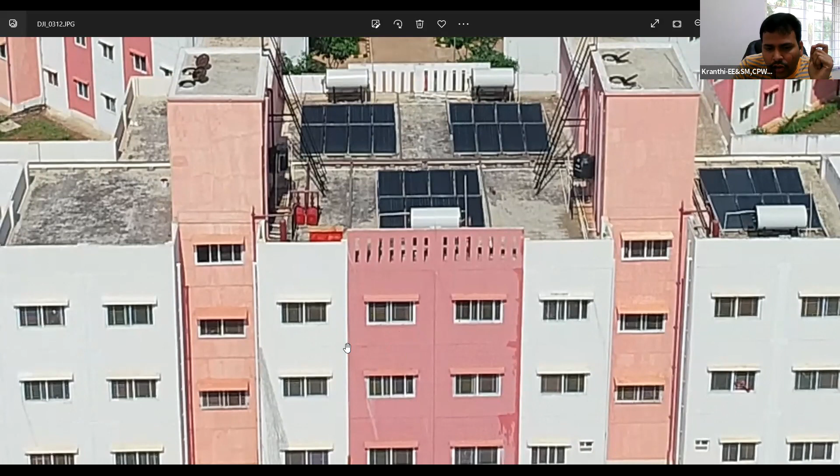So even if whoever does these joints properly, when heavy rains happen there will be a small dampness which will be visible inside the building. Okay. So at this portion, wherever you see it, again you have to do the proper grouting. Then only these holes will be completely grouted, and over a period of time this dampness will not occur.

But we have faced this problem during the first 1-2 years. We have seen this dampness, but now after doing the grouting multiple times, we are not facing any kind of problem right now. But initially we faced this problem.

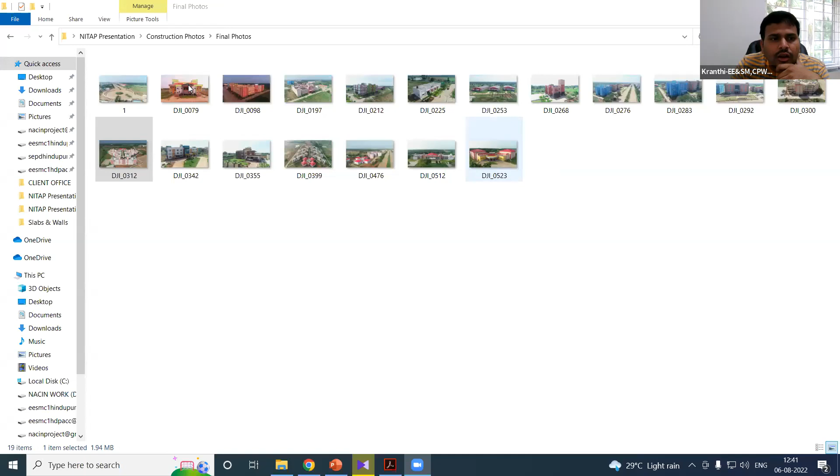Okay, sir. Sir, after laying these prefab slabs, you said something about screed reinforcement. Are we laying one more layer of concrete over these slabs? Yes, concrete we are laying. Then how do we ensure bond between these? See, that's what I am saying. Previously also I said to you, let me share my screen. I think you are able to see, right?